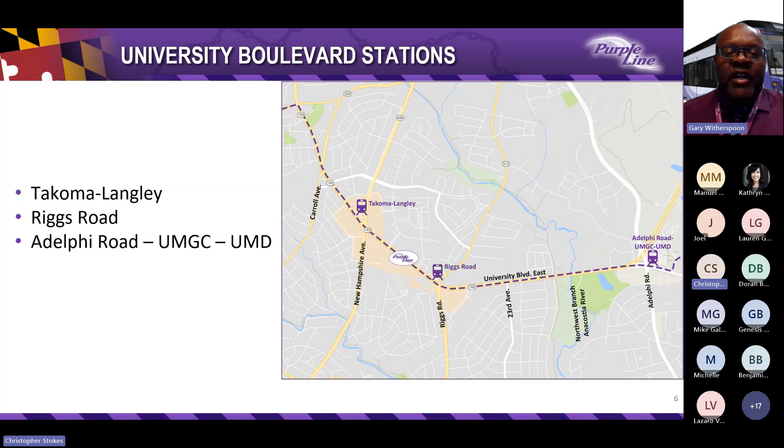Tonight, we'll cover the segment of the Purple Line that includes the following stations: Takoma-Langley, Riggs Road, and Adelphi Road, UMGC, UMD. We are excited to share that we've created new renderings, some of which we're sharing for the first time during this meeting. Along University Boulevard, the project will enhance pedestrian safety around each station with ADA-compliant crosswalks and upgraded signals to include pedestrian countdowns to safely cross the roadway.

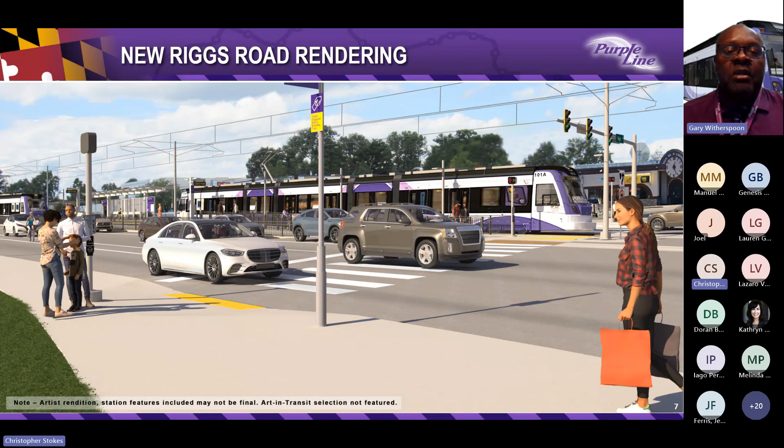All of the stations along University Boulevard will be center platforms in the median of the road. This first rendering features the Riggs Road Station, located just west of Riggs Road on University Boulevard. Next, you can see the Adelphi Road UMGC UMD station on Campus Drive, just east of Adelphi Road. Again, we're delighted that we can give you a better idea of how your station areas will look.

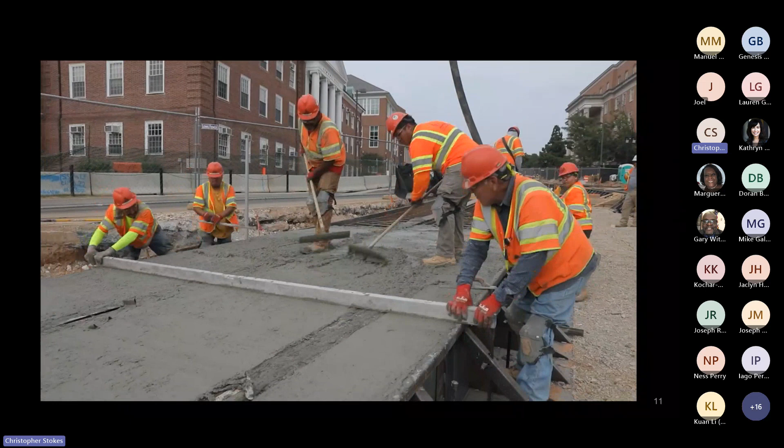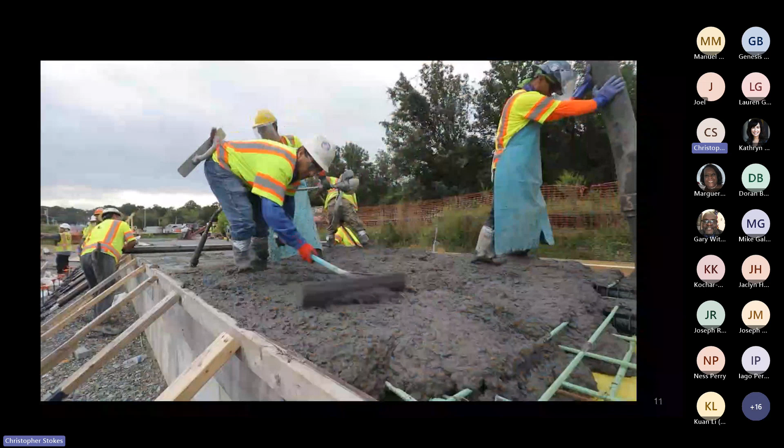I'm sitting here at one of the many businesses that will benefit from the Purple Line, directly across the street from the new Riverdale North UMD station. This will be the first complete station. As we near the end of 2023, the nearly 1,000 workers building the Purple Line is making measurable progress along the alignment.

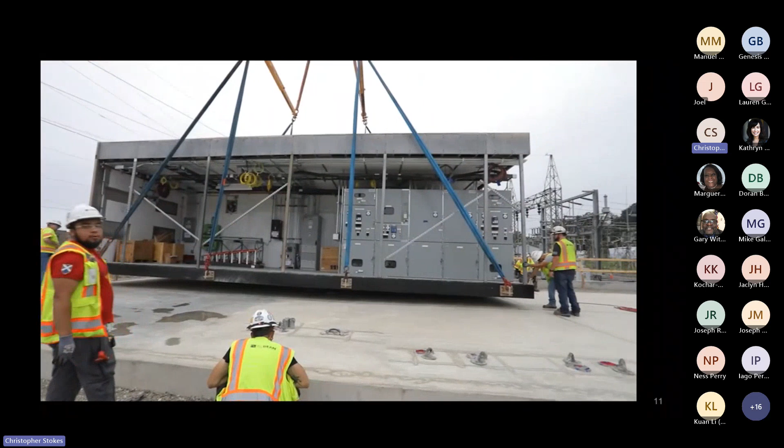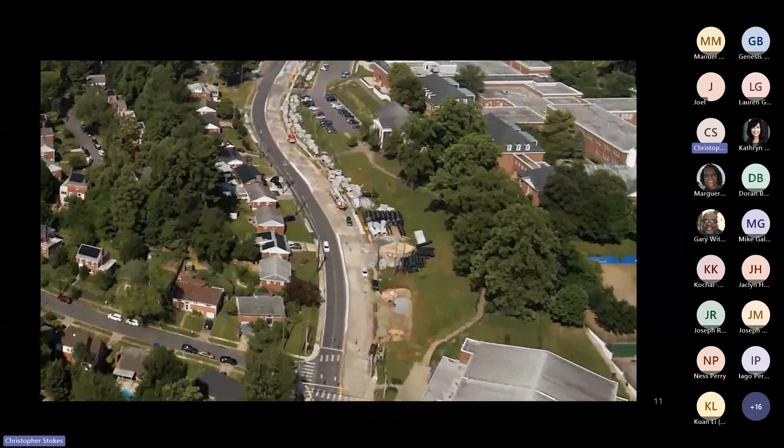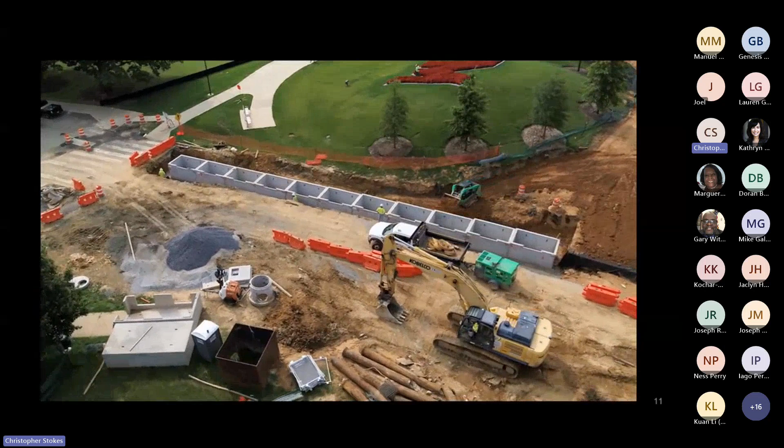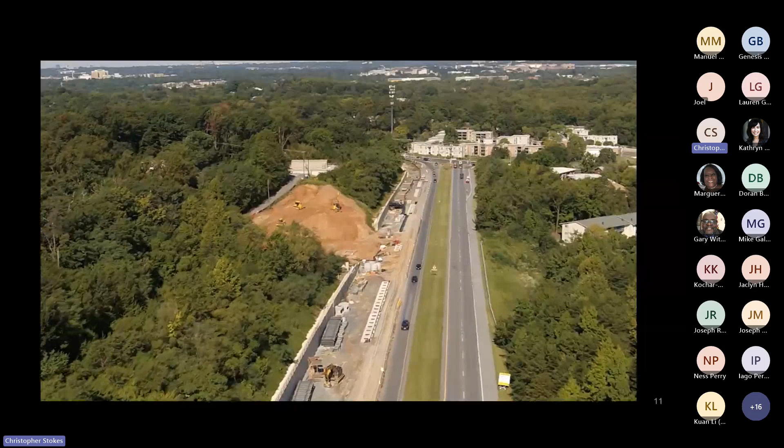Another significant improvement is the new stormwater management system. This includes miles of new pipes ranging from 12 inches to over 72 inches in diameter. More than 53% of this new pipework is now complete. Along with concrete pipes, our teams have installed over 20,000 square feet of underground sand filters, retention ponds, and planter boxes, all important parts of the new stormwater drainage system. These critical environmental upgrades may not be visible above ground, but must be completed before tracks are added.

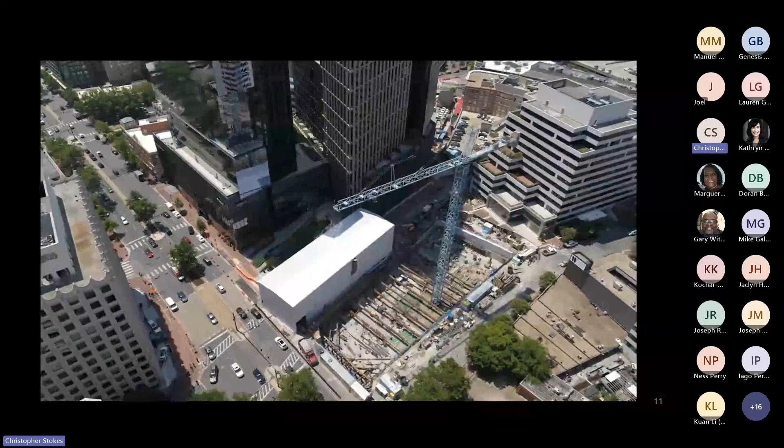In Bethesda, work connecting the elevator to Metro's Red Line has reached the bottom of the shaft, and teams have started excavating horizontally to create the cavern. Fire in the hole!

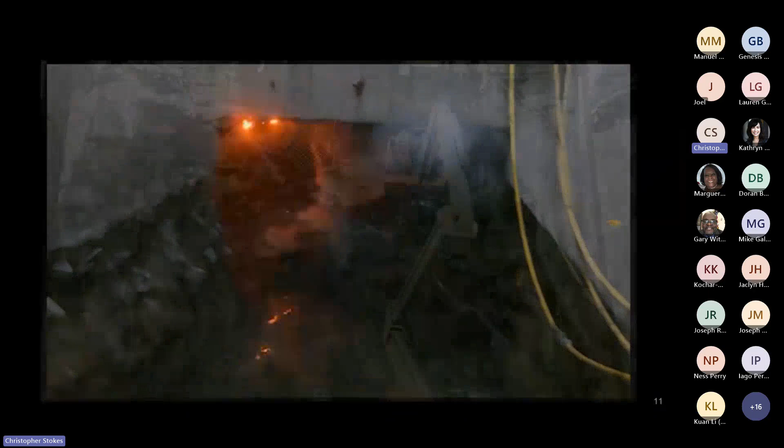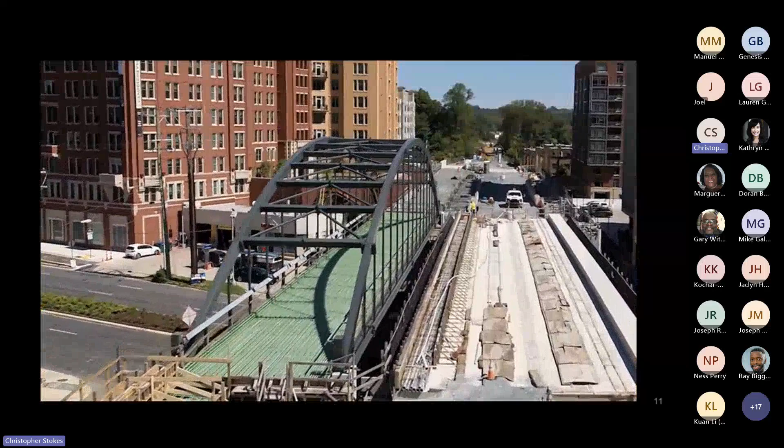The Elm Street pedestrian path across the alignment, as well as another half a dozen bridges and underpasses, will serve the new and improved Capitol Crescent Trail. Concrete placement of the historic Talbot Avenue Bridge occurred in early 2023, along with necessary road improvements, making it possible to open the road this year.

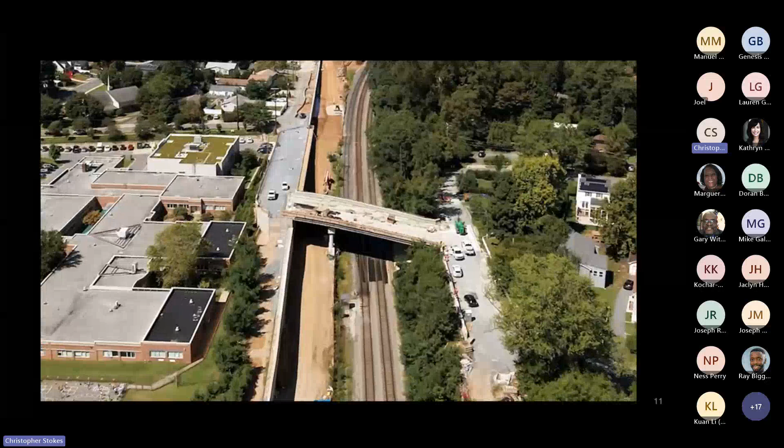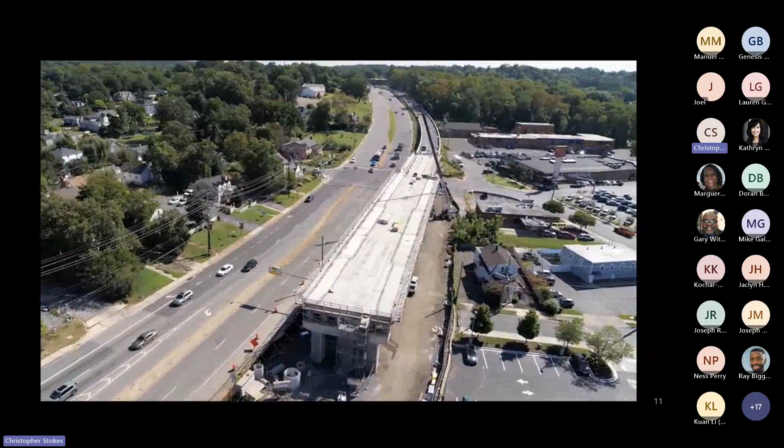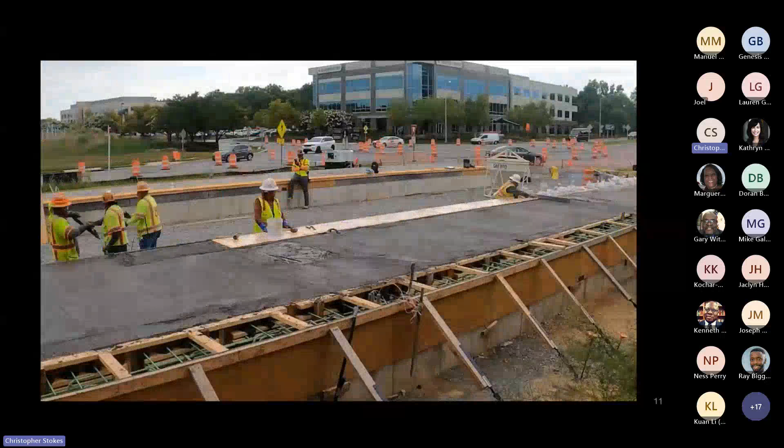Concrete for the elevated Silver Spring Station and the elevated Kenilworth Riverdale Station are complete, and crews are hard at work on the utilities and other advanced station elements. And speaking of stations, more than half of Purple Line stations are currently under construction, with structural canopies installed at Riverdale Park North UMD. Canopies provide an exciting glimpse of how Purple Line stations will look.

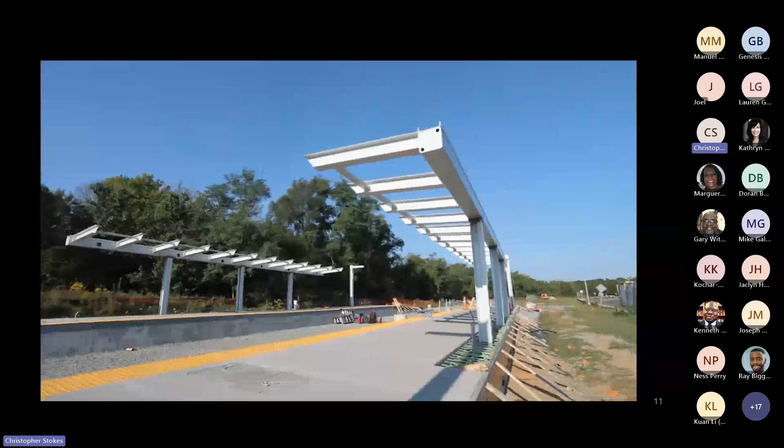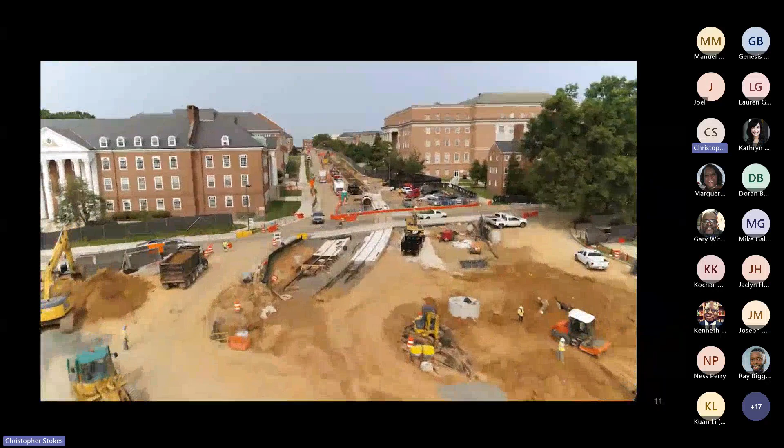During the summer break at the University of Maryland, crews accomplished a tremendous amount of work, completing drainage, roads, and tracks. Over 1,500 linear feet of track is now in place on campus as part of the 5 future stations servicing the University of Maryland.

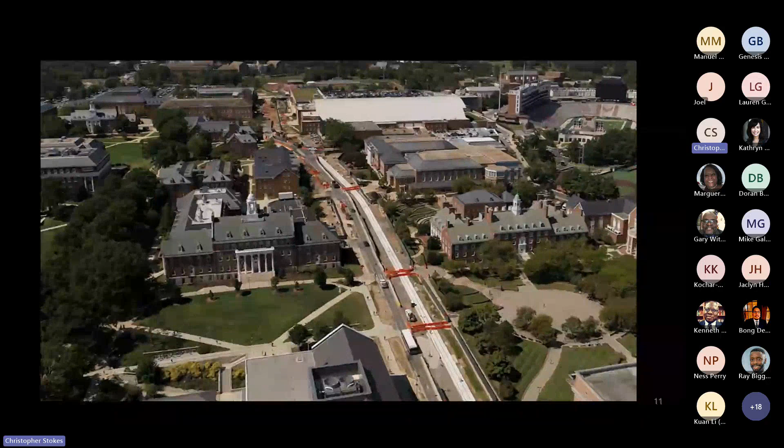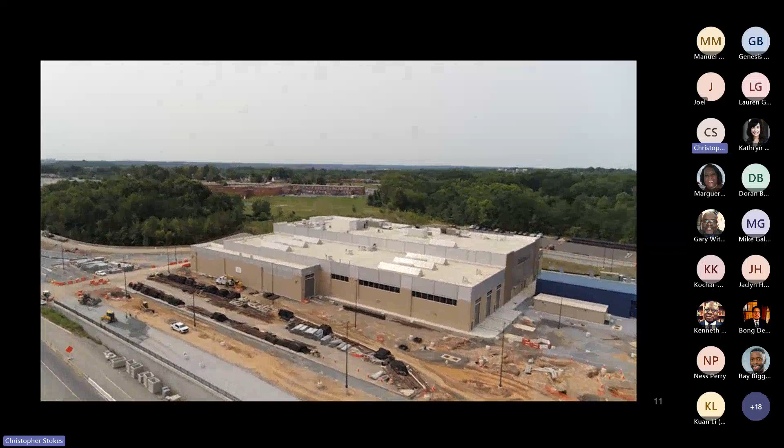Along Veterans Parkway, our Glen Ridge Operation and Maintenance Facility is fully operational, with yard utilities and specialty track installation underway. Purple Line light rail vehicles are scheduled for delivery here in early 2024.

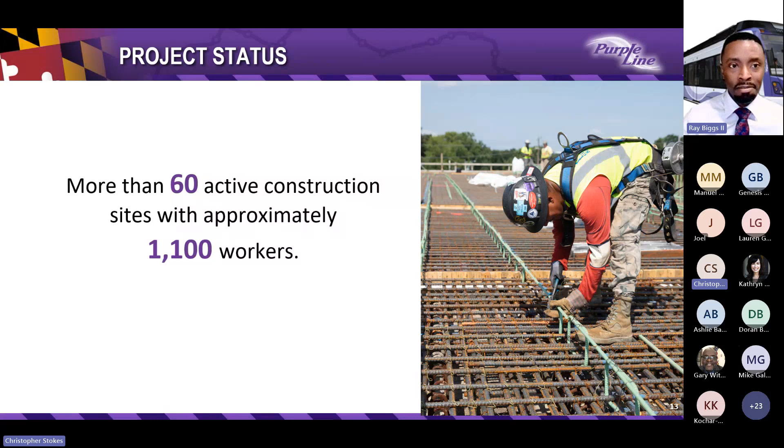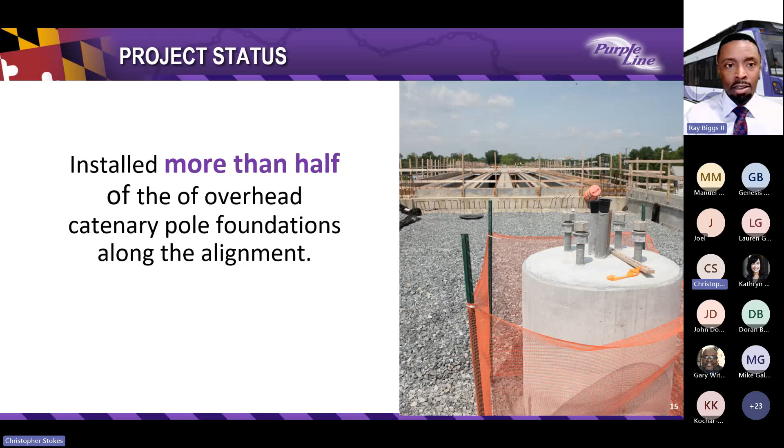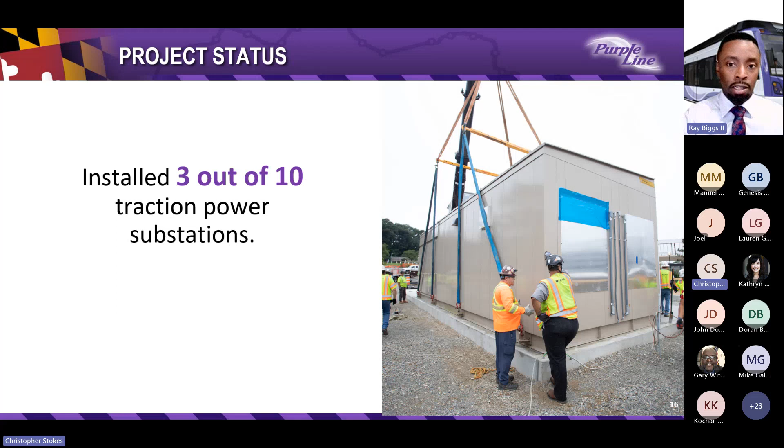In addition to that, we have 98% of the underground utility relocations complete, and additionally we've installed more than half of the overhead catenary pole foundations along the alignment. Those will be the poles that will supply the power to the trains that comes from the traction power substations, which we have installed three of the 10 traction power substations along the alignment.

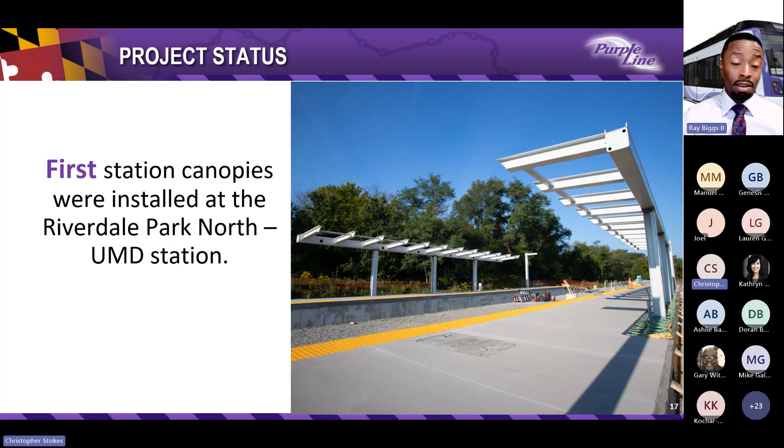As you saw in the video, our first station canopy at the Riverdale Park North UMD station has gone up, and we are installing more canopies along the 11 stations that we are working on right now.

We have 26 of the 28 light rail vehicles complete. They are up in Elmira, New York. They are 142 feet long. It's sometimes hard to imagine how long that is, but that is pretty big, and in fact it is the longest light rail vehicle in America today.

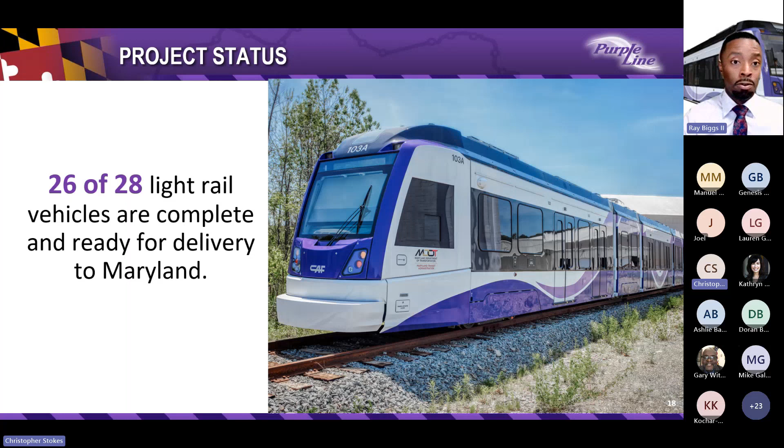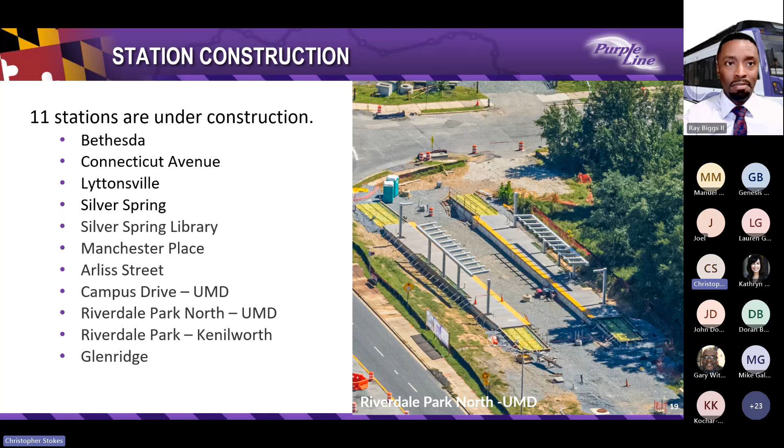With that, I'll turn it over to Doran Basso, the CEO for Purple Line Transit Partners, to give you a schedule update. Doran? Thanks, Ray.

But let's walk through where we're headed over the next few years at a high level. As Ray mentioned, those light rail vehicles are ready for delivery, and we're really looking forward to having them here in Maryland in the first part of 2024.

The next step then will be to work to complete the test track, where we can begin to test the vehicles near our Glenridge O&M facility. And then by winter 2025, system-wide testing will begin in preparation for passenger service in 2027.

So for a few more details on what's going on along this corridor, let's talk to Manuel. Thank you, Doran. Thank you, everybody, for being here today.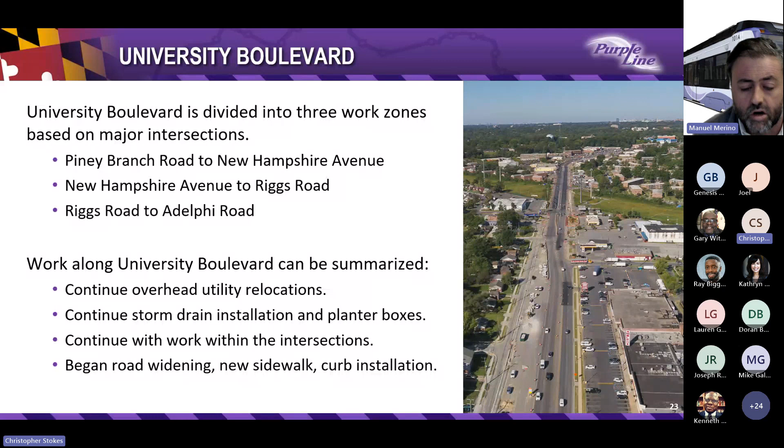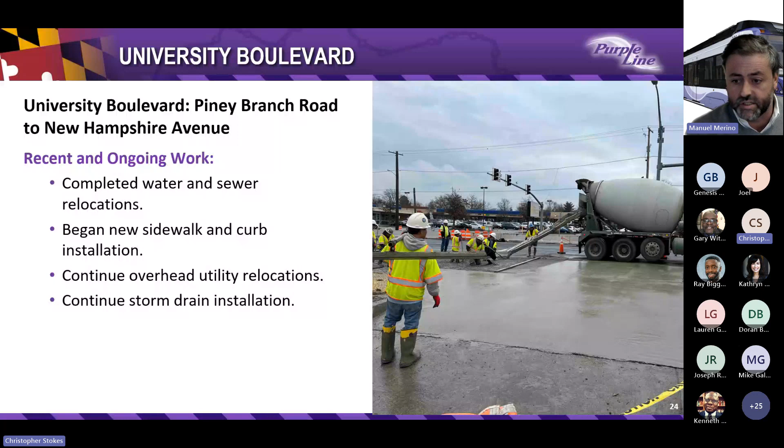Like I mentioned, the first portion of University Boulevard between Piney and New Hampshire, we have already completed the water and sewer relocation. You guys have probably already seen, in some of the areas, new completed sidewalk and curb, overhead relocation, and the storm drain installation is going on in the vast majority of the area.

On the next section, it's a little bit of the same: utility, storm drain, and in some areas we are going to start with the planter box installation. There are big precast boxes that are going to be installed along the alignment in certain areas for filtering and treatment of the water.

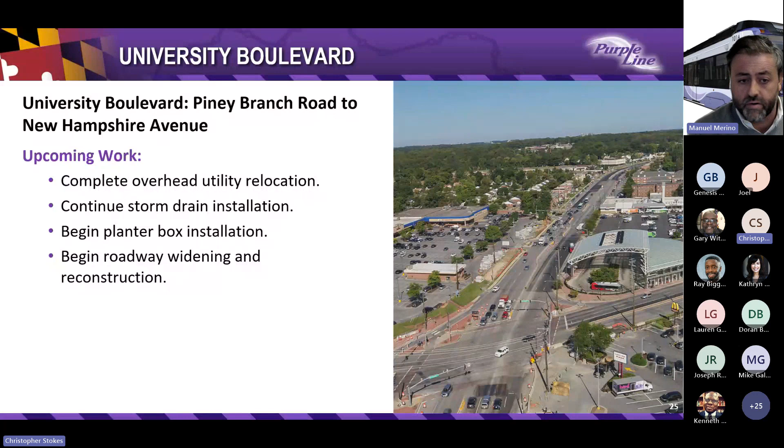In the next section between New Hampshire and Riggs Road, storm drain installation is going on, as you can see in the picture, on the westbound, and we'll continue on the eastbound. We'll continue with the relocation of overhead utilities. We have successfully completed the crossings along the alignment on 15th Avenue, 14th, all the way to Edwards.

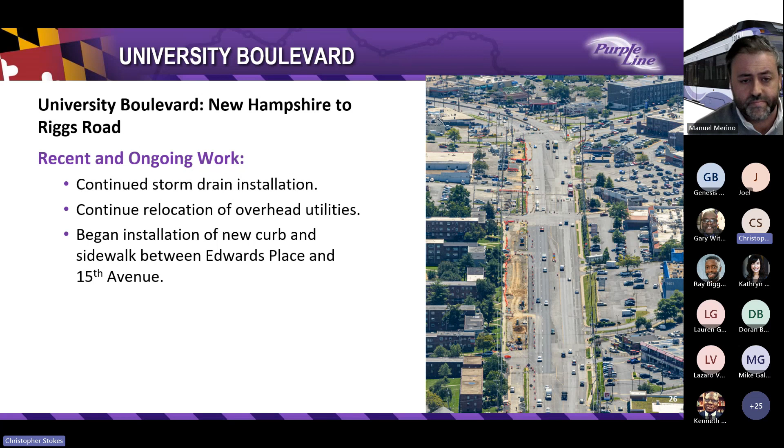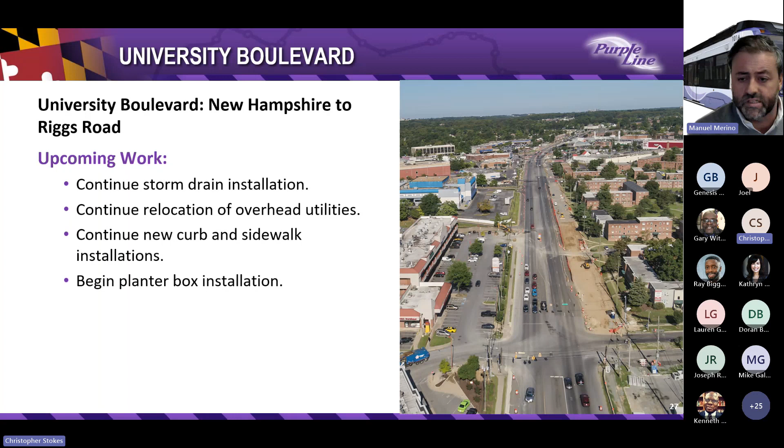As upcoming work in this stage, we're going to continue with the storm drain installation, and soon you're going to start seeing new sidewalk, new curb, and widening, as well as the planter box installation that is set to start in the coming weeks.

The last portion of the University Boulevard is between Riggs Road and Adelphi Road. The water and sewer relocation is being completed. We have installed the stormwater management facility between the 23rd and 24th Avenue, which is a big and complex precast structure just recently completed. We have completed the installation of the curb and the sidewalk between 23rd and West Park Drive, and we continue with the storm drain installation along the alignment as well as the crossing of University.

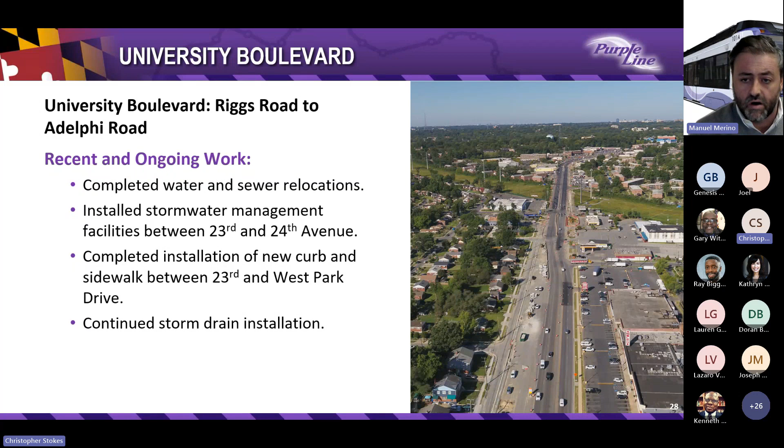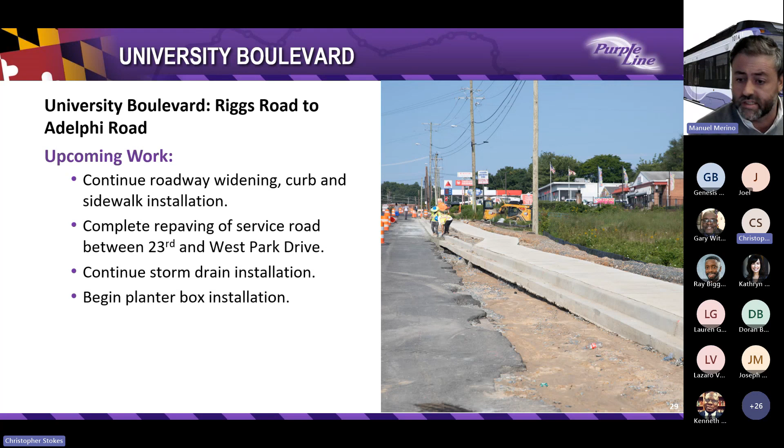Work that is going to continue, as you can see, is the curb, the widening, and the sidewalk installation. The complete repaving of the service road between the 23rd and West Park Drive on the eastbound side is one of the next steps that we're going to undertake. Storm drain installation and the planter box installation has already started and is going to continue.

Towards the end of this segment, we have the Northwest Branch Bridge. We have completed the installation of the foundation. We have recently placed the precast girders for both the light rail bridge as well as the highway bridge.

As oncoming work, we are going to continue with the stream bank restoration over the next months, complete the bridge deck installation and all the features on top of the bridge, with the goal to reopen it to traffic in early 2024.

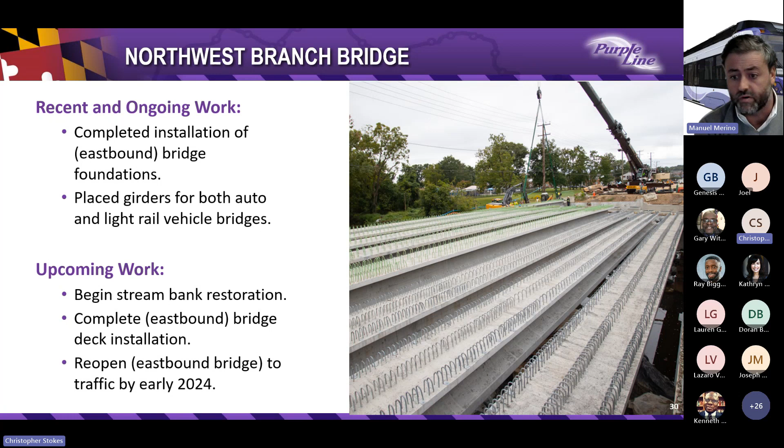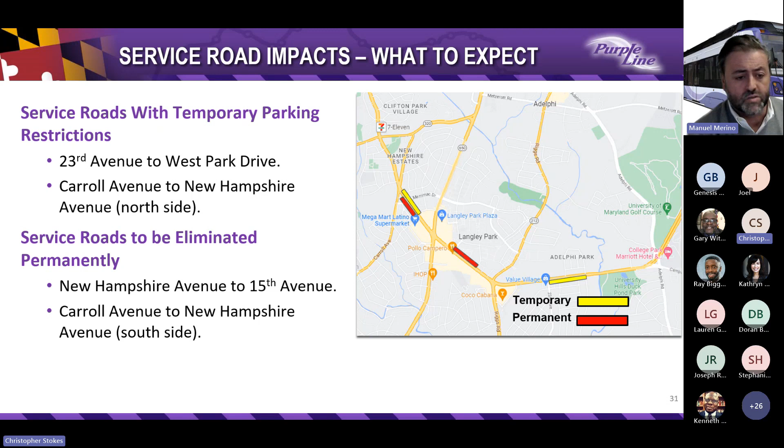As a busy area, we have several service road impacts that we are expecting between 23rd Avenue and West Park. The service road and parking have some temporary restrictions, as well as between Carroll Avenue to New Hampshire Avenue on the north side. Service roads that are going to be eliminated permanently in the permanent configuration will be New Hampshire Avenue to 15th Avenue, as well as Carroll Avenue to New Hampshire on the south side.

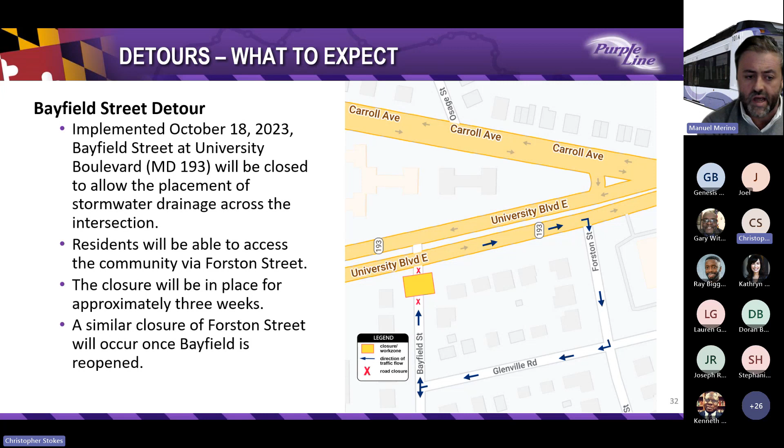As we progress construction, we're also out in our community daily and weekly, meeting with folks. One thing that we are doing in this area is the Crossroads Farmers Market. We do that once a month. Our team is out volunteering, answering Purple Line questions. So if you're in the area, please stop by and see us.